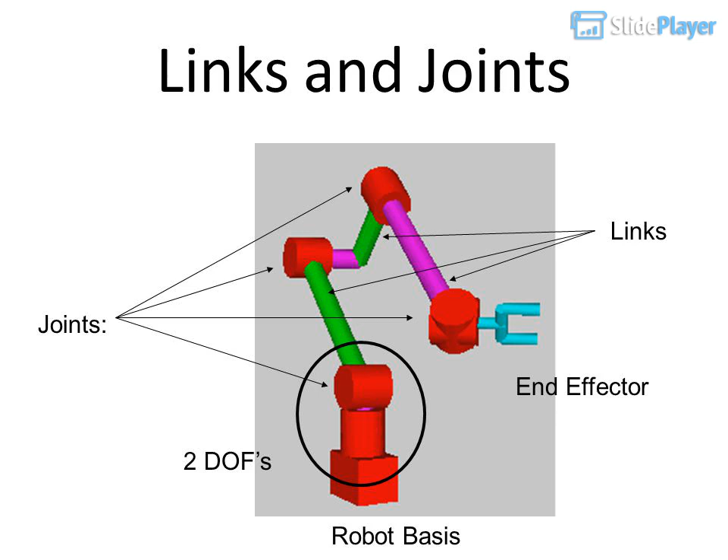Links and joints. Joints. Links. Two DOFs. End effector. Robot basis. Denavit-Hartenberg details and examples. Chapter 2, Robot Kinematics, Position Analysis. Denavit-Hartenberg representation. Symbol terminologies.

Rotation about the z-axis, theta. d, the distance on the z-axis. a, the length of each common normal, joint offset. Alpha, the angle between two successive z-axes, joint twist. Only theta and d are joint variables. The z-axis is aligned with the joint.

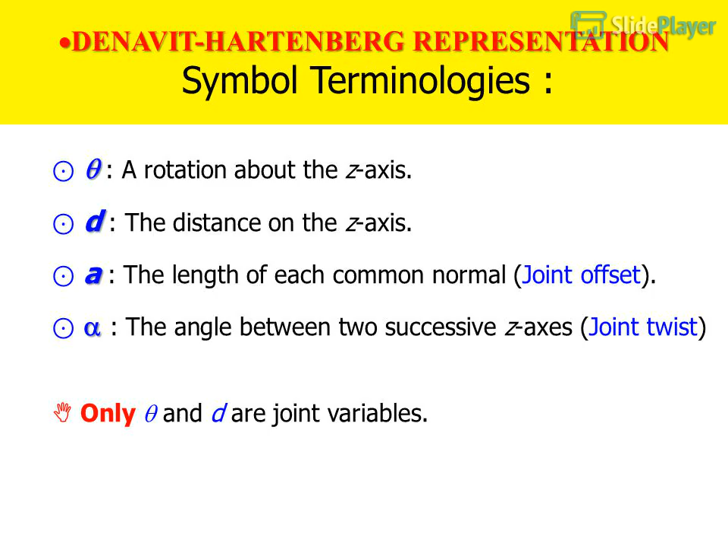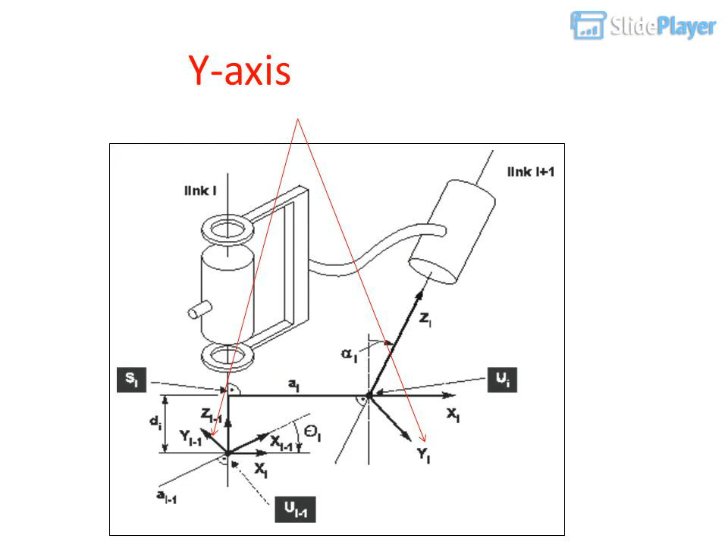Joints, links. The x-axis is aligned with the outgoing limb. The y-axis is orthogonal. Joints are numbered to represent hierarchy. Joint i-1 is the parent of joint i. Parameter a(i-1) is the outgoing limb length of joint i-1.

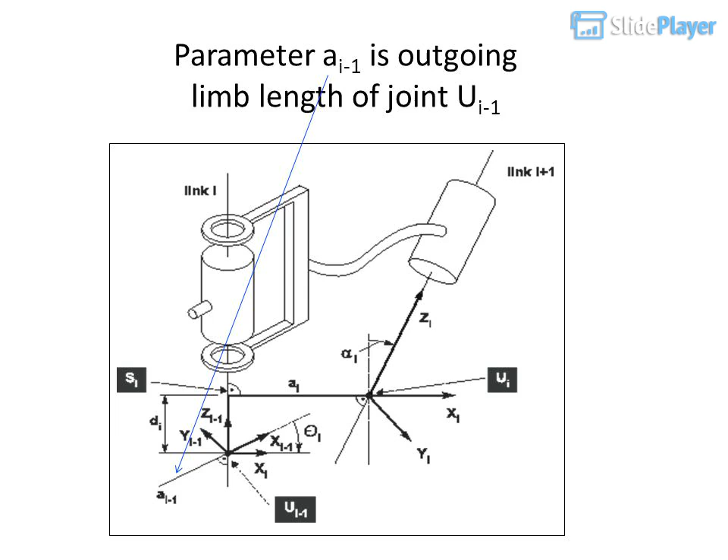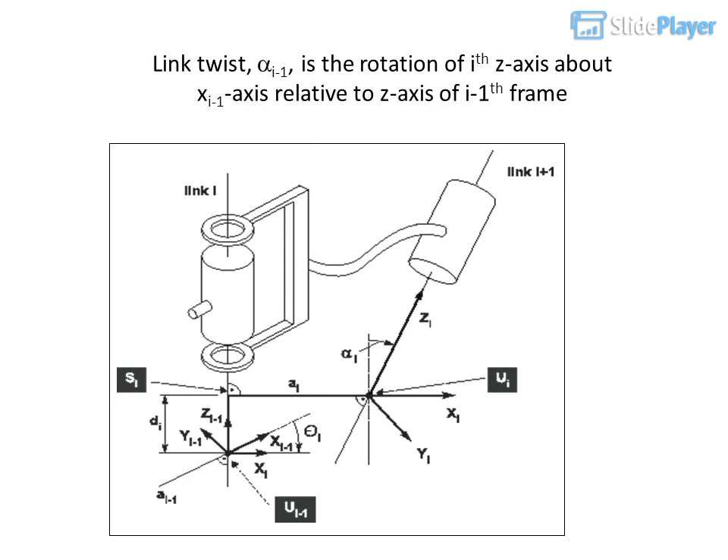Joint angle, theta i, is the rotation of x(i-1) about z(i-1) relative to x(i). Link twist, alpha i-1, is the rotation of ith z-axis about the x(i-1) axis relative to the z-axis of the (i-1)th frame. Link offset, d i-1, specifies the distance along the z(i-1) axis, rotated by alpha i-1, of the ith frame from the (i-1)th x-axis to the ith x-axis.

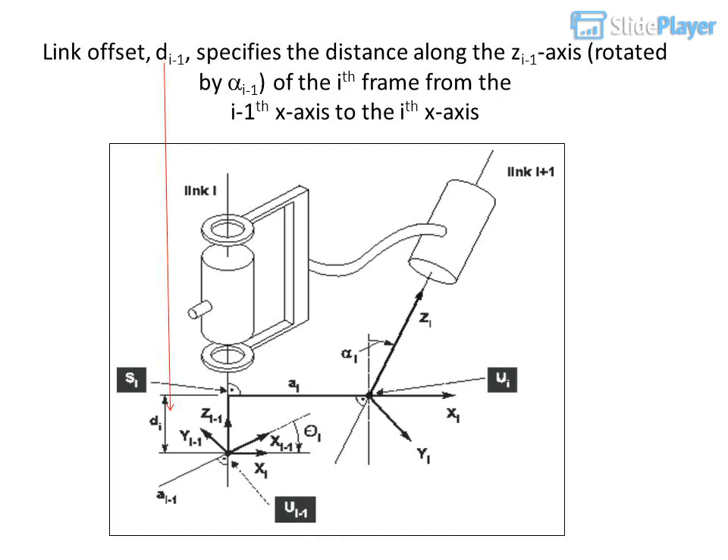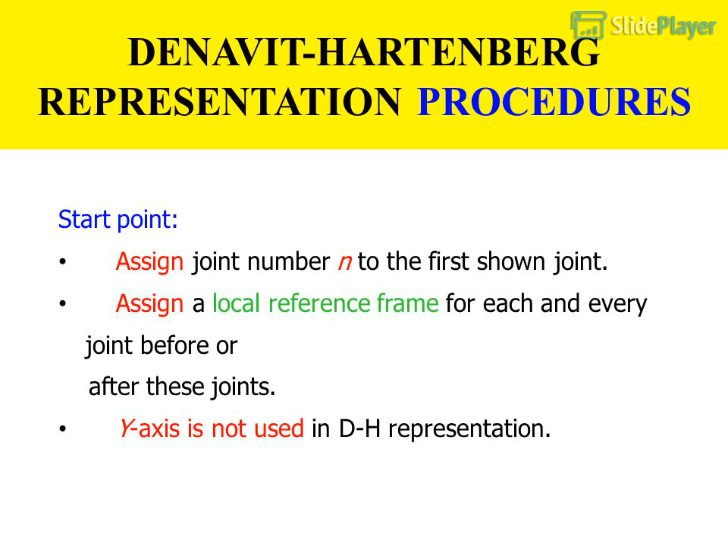Denavit-Hartenberg representation procedures. Start point: assign joint number n to the first shown joint. Assign a local reference frame for each and every joint, before or after these joints. The y-axis is not used in DH representation.

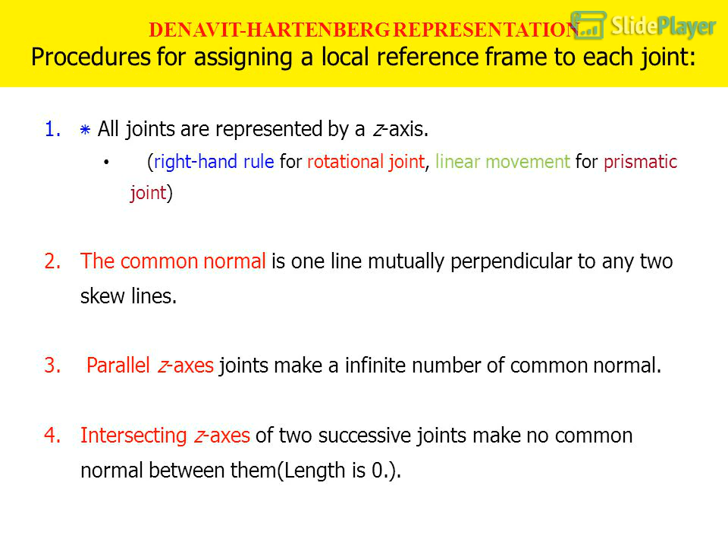Procedures for assigning a local reference frame to each joint. All joints are represented by a z-axis. Use the right-hand rule for a rotational joint, and linear movement for a prismatic joint. The common normal is one line mutually perpendicular to any two skew lines. Parallel z-axis joints make an infinite number of common normals. Intersecting z-axes of two successive joints make no common normal between them; the length is 0.

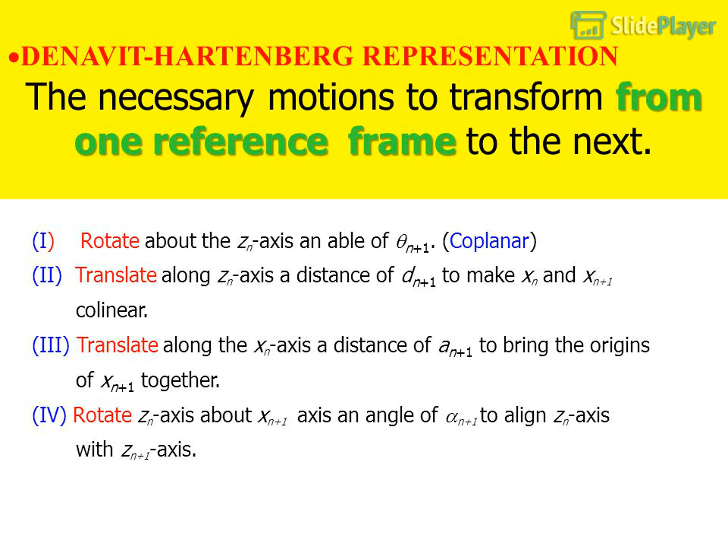Denavit-Hartenberg representation: the necessary motions to transform from one reference frame to the next. 1. Rotate about the z(n) axis by an angle of theta(n+1), making the axes coplanar. 2. Translate along the z(n) axis a distance of d(n+1) to make x(n) and x(n+1) collinear. 3. Translate along the x(n) axis a distance of a(n+1) to bring the origins of x(n) and x(n+1) together. 4. Rotate z(n) about the x(n+1) axis by an angle of alpha(n+1) to align the z(n) axis with the z(n+1) axis.

Denavit-Hartenberg parameters: a general explanation. Only theta and d are joint variables. The idea: each joint is assigned a coordinate frame. Using the Denavit-Hartenberg notation, you need four parameters to describe how frame i relates to the previous frame i-1.

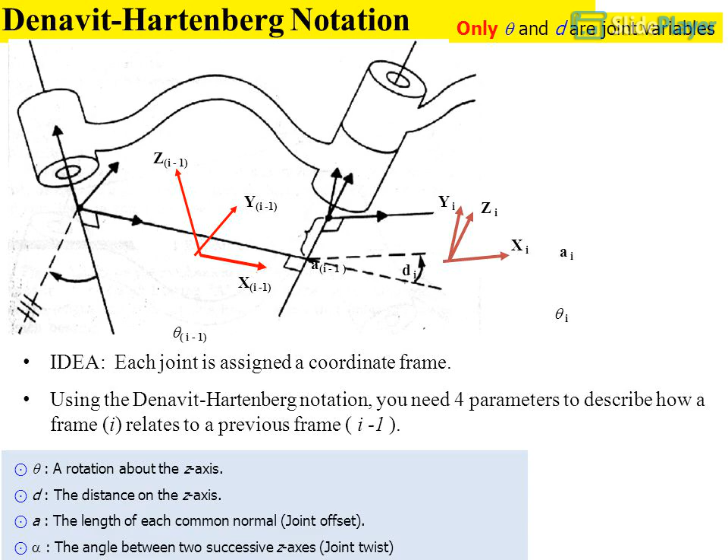The parameters or variables are theta, d, a, and alpha. Theta is rotation about the z-axis. d is the distance on the z-axis. a is the length of each common normal, joint offset. Alpha is the angle between two successive z-axes, joint twist. You can align the two axes using just these four parameters.

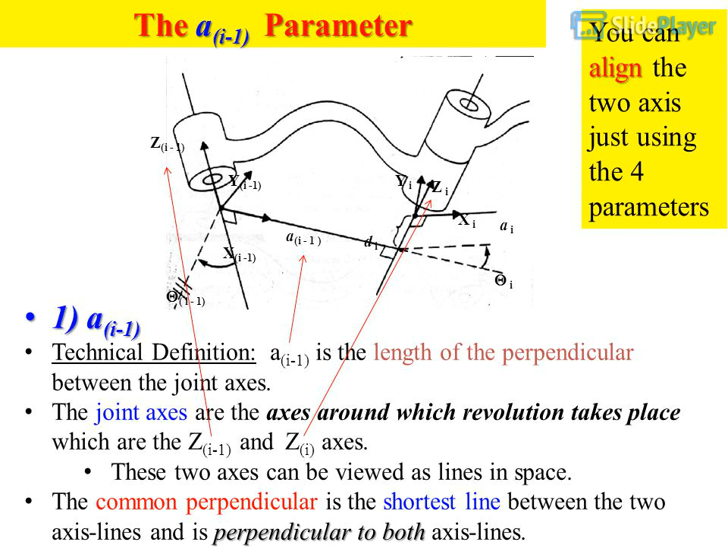Technical definition: a(i-1) is the length of the perpendicular between the joint axes. The joint axes are the axes around which revolution takes place, which are the z(i-1) and z(i) axes. These two axes can be viewed as lines in space. The common perpendicular is the shortest line between the two axis lines and is perpendicular to both.

a(i-1), continued. Visual approach: a way to visualize the link parameter a(i-1) is to imagine an expanding cylinder whose axis is the z(i-1) axis. When the cylinder just touches the joint axis, the radius of the cylinder is equal to a(i-1). Manipulator kinematics.

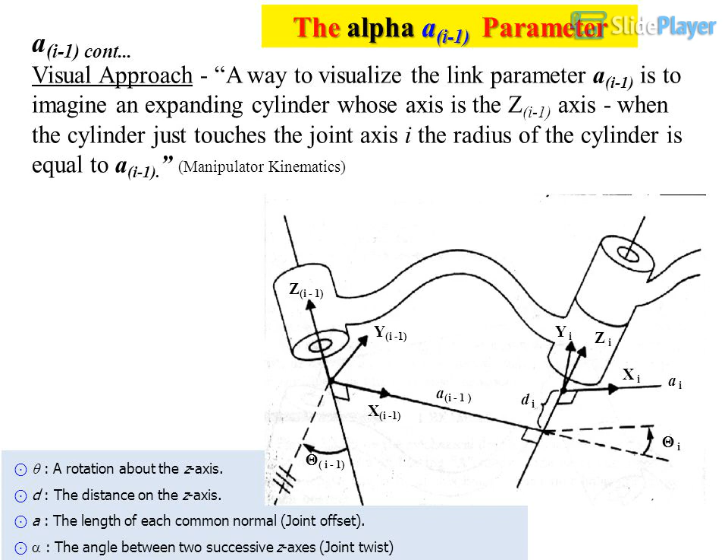Diagram approach: if the diagram already specifies the various coordinate frames, then the common perpendicular is usually the x(i-1) axis. So a(i-1) is just the displacement along x(i-1) to move from the frame i-1 to the frame i. If the link is prismatic, then a(i-1) is a variable, not a parameter.

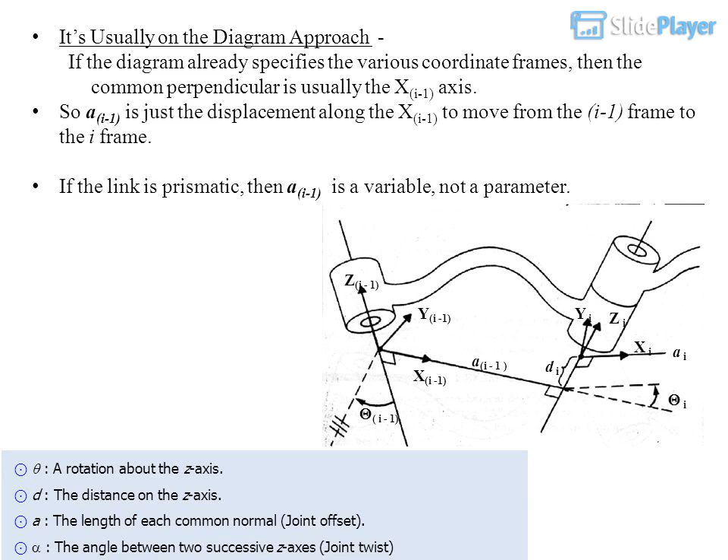The alpha(i-1) parameter, parameter 2, technical definition: the amount of rotation around the common perpendicular so that the joint axes are parallel. That is, how much you have to rotate around the x(i-1) axis so that z(i-1) is pointing in the same direction as the z(i) axis. Positive rotation follows the right-hand rule.

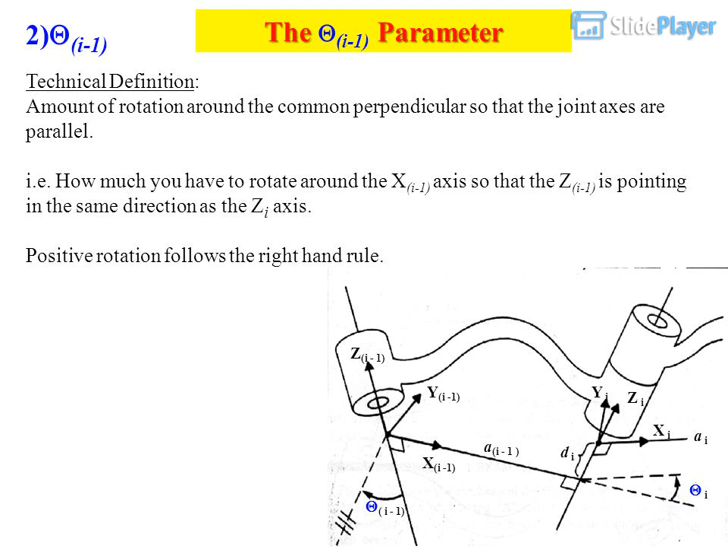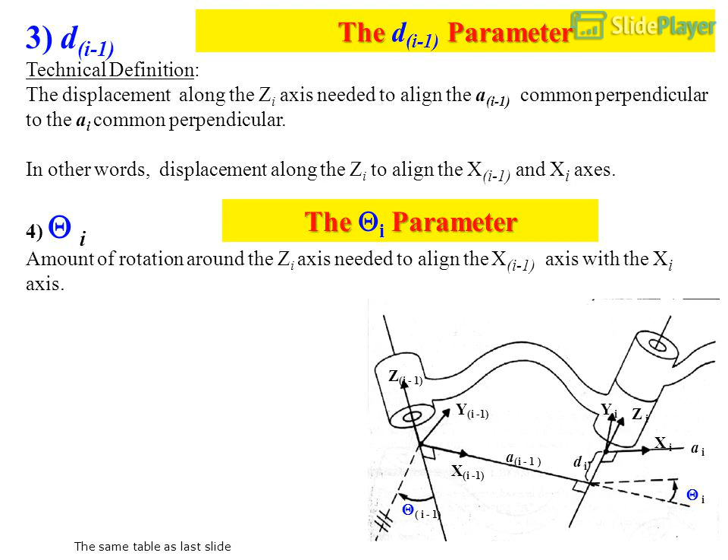The same table as the last slide. The Denavit-Hartenberg matrix: just like the homogeneous matrix, the Denavit-Hartenberg matrix is a transformation matrix from one coordinate frame to the next. Using a series of DH matrix multiplications and the DH parameter table, the final result is a transformation matrix from some frame to your initial frame.

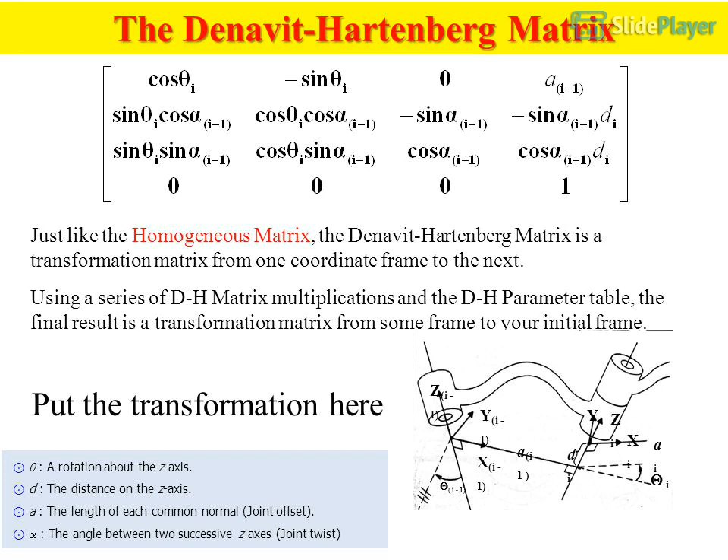Put the transformation here. Rotation about the z-axis, theta. d, the distance on the z-axis. a, the length of each common normal, joint offset. Alpha, the angle between two successive z-axes, joint twist. Example: calculating the final DH matrix with the DH parameter table.

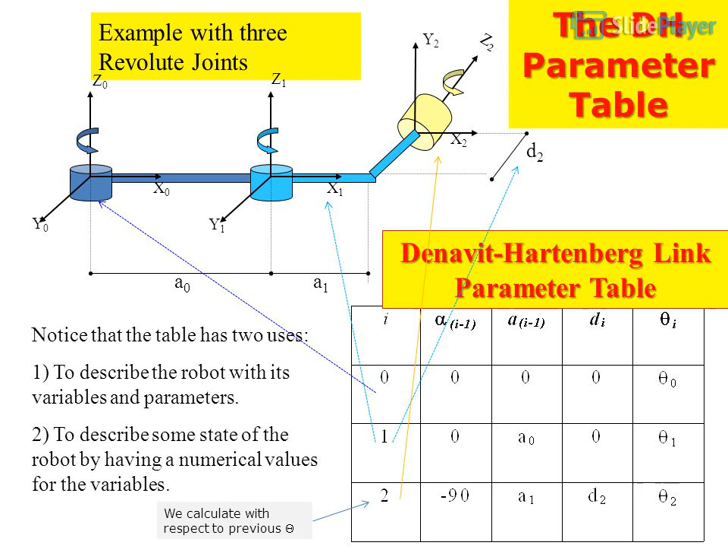Denavit-Hartenberg link parameter table. Notice that the table has 2 uses. 1. To describe the robot with its variables and parameters. 2. To describe some state of the robot by having numerical values for the variables. We calculate with respect to the previous frame.

Denavit-Hartenberg link parameter table. Example with 3 revolute joints. Z0, X0, Y0, Z1, X2, Y1, Z2, X1, Y2, D2, A0, A1.

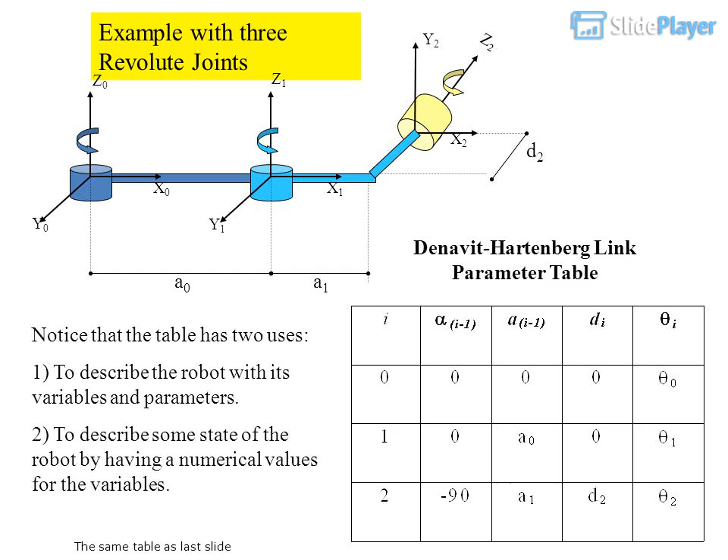Denavit-Hartenberg link parameter table. Notice that the table has 2 uses. 1. To describe the robot with its variables and parameters. 2. To describe some state of the robot by having numerical values for the variables. The same table as last slide: D2, A0, A1. Note, T is the DH matrix with i-1 equals 0 and i equals 1.

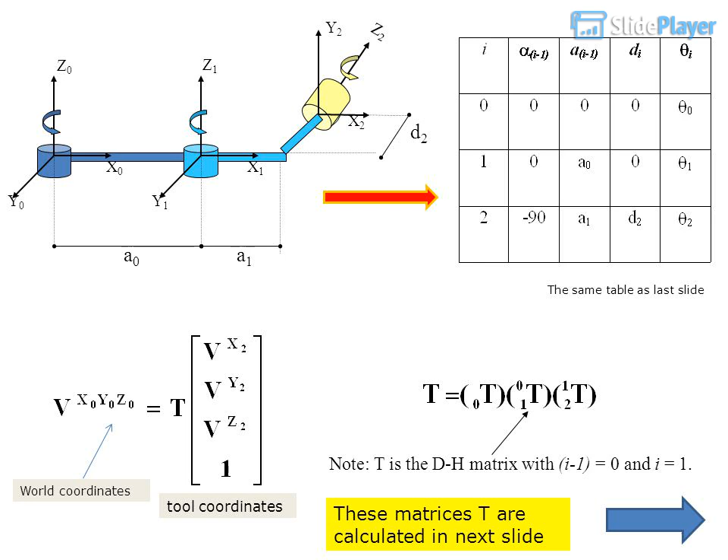Z0, X0, Y0, Z1, X2, Y1, Z2, X1, Y2, D2, A0, A1. The same table as last slide. Note, T is the DH matrix with i-1 equals 0 and i equals 1. World coordinates. Tool coordinates. These matrices T are calculated in the next slide.

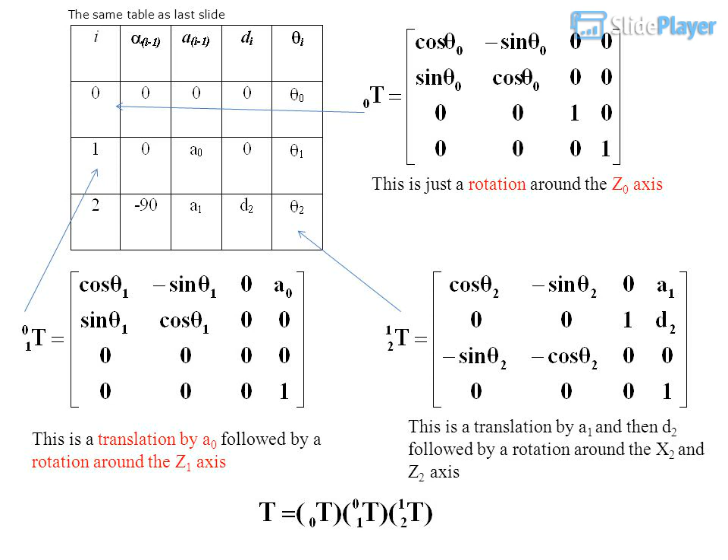This is just a rotation around the Z0 axis. The same table as last slide. This is just a rotation around the Z0 axis. This is a translation by A1 and then D2 followed by a rotation around the X2 and Z2 axis. This is a translation by A0 followed by a rotation around the Z1 axis.

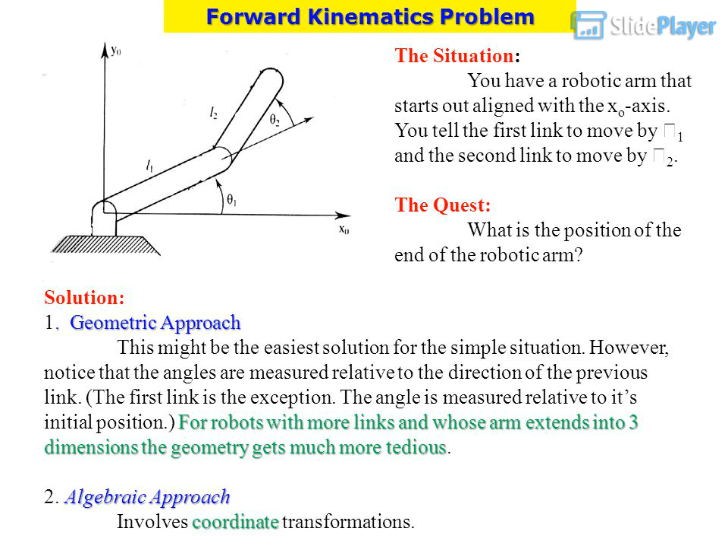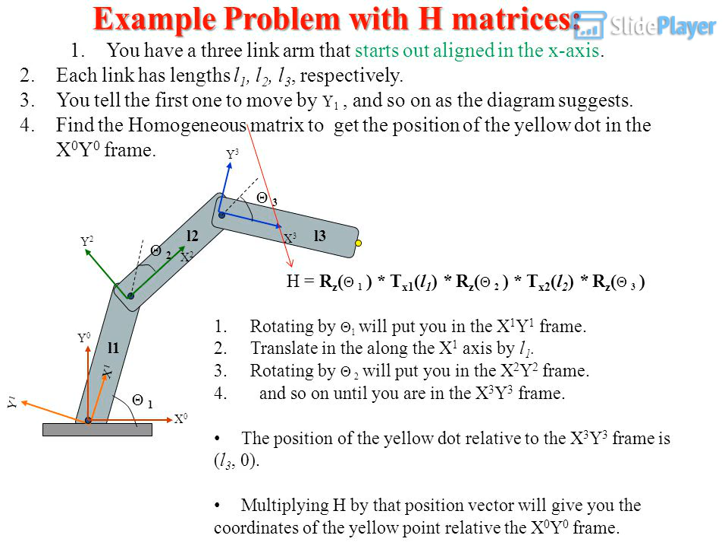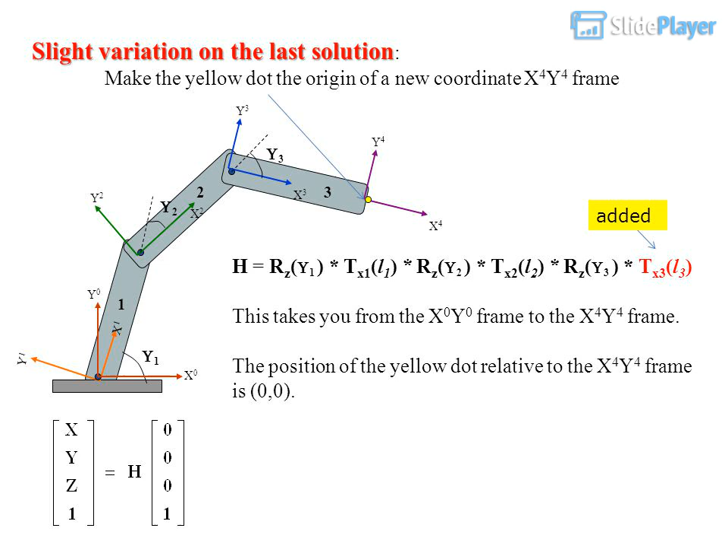Slight variation on the last solution. Make the yellow dot the origin of a new coordinate X4, Y4 frame. Y3, Y4, θ3, θ2, Y2, X3, X2. Added X4. H equals R(z,θ1), T(x1,L1), R(z,θ2), T(x2,L2), R(z,θ3), T(x3,L3). This takes you from the X0, Y0 frame to the X4, Y4 frame. The position of the yellow dot relative to the X4, Y4 frame is (0, 0).

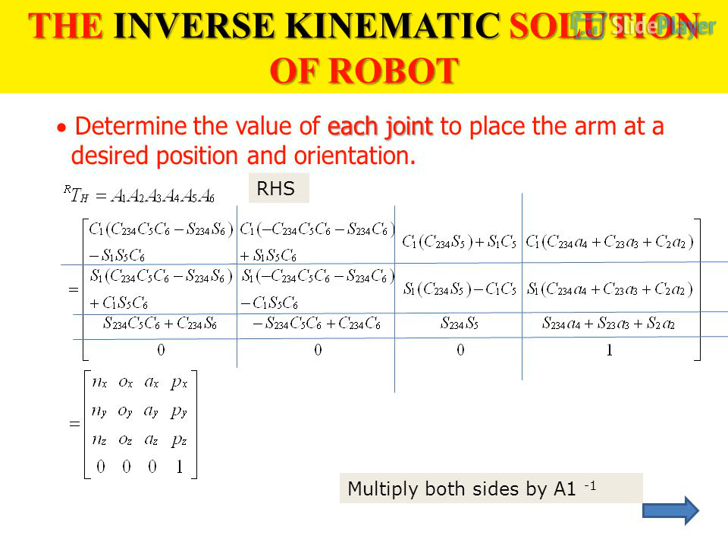The inverse kinematic solution of a robot. Determine the value of each joint to place the arm at a desired position and orientation. Multiply both sides by A1 inverse.